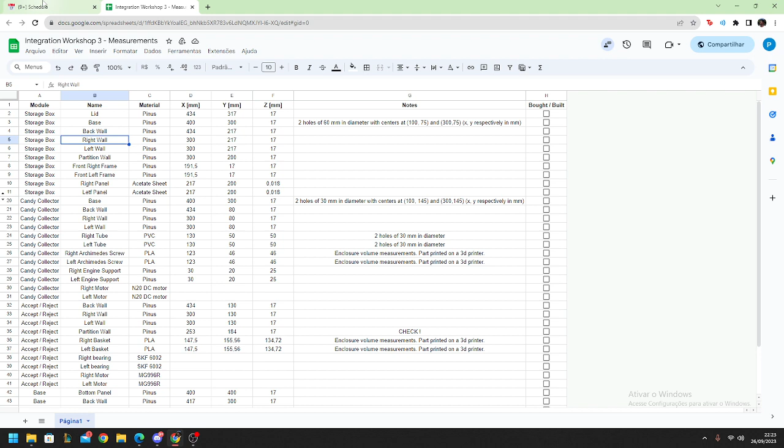Another task is to determine the measure of all pieces. We measured everything we need, because it's important for buying these pieces. We also had simple tasks, made the electrical design, some studying tasks, and some risk response tasks like testing and making the alternate electric design.

Let's talk about the deliverable itself. Just a note that we are 23 hours delayed because of this problem with the mechanical design. So let's go to the deliverable itself.

One comment: we also have this journal where we make notes of what we did each day. Here we talk a little about our problems, you can take a look after this video. So let's go to Deliverable One, that's what's important.

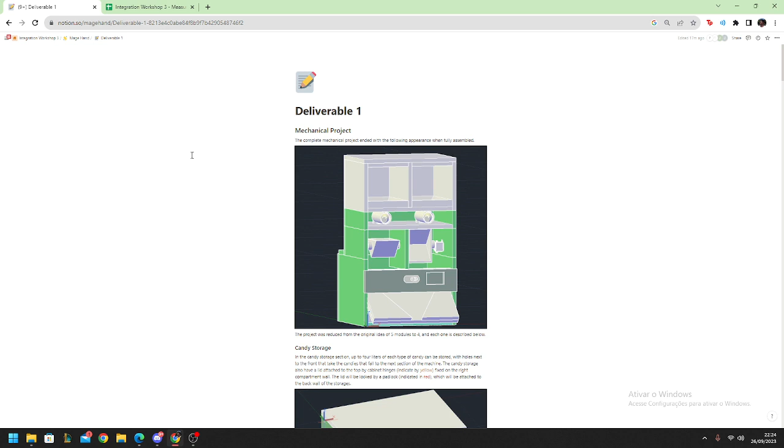So the mechanical project is like this, this is the complete structure. We divided it originally into 5 modules, but now it has only 4: the container of the candies, the picker, the accept and reject mechanism, and the base of the project.

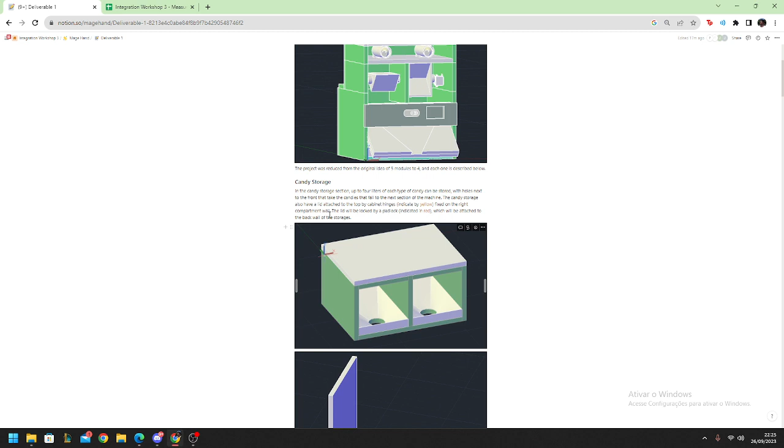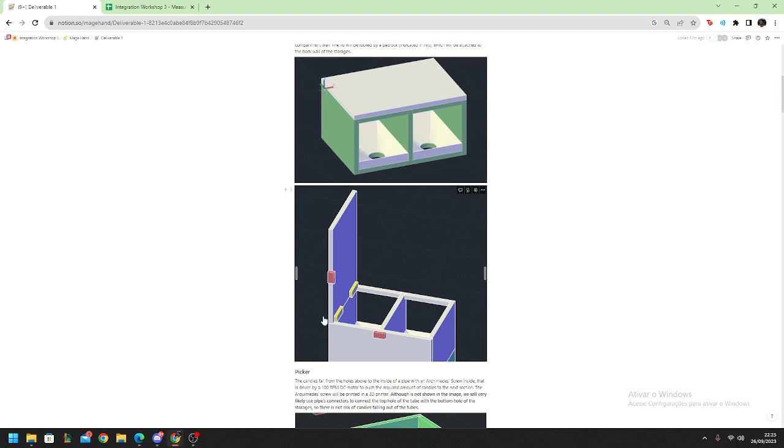Let's start with the candy storage. It can store up to 4 liters of each type of candy. It has these holes, and the candies will go through these holes. We also have these hinges where we'll attach the padlock, so the owner of the machine will be able to open it and replace the candies if necessary.

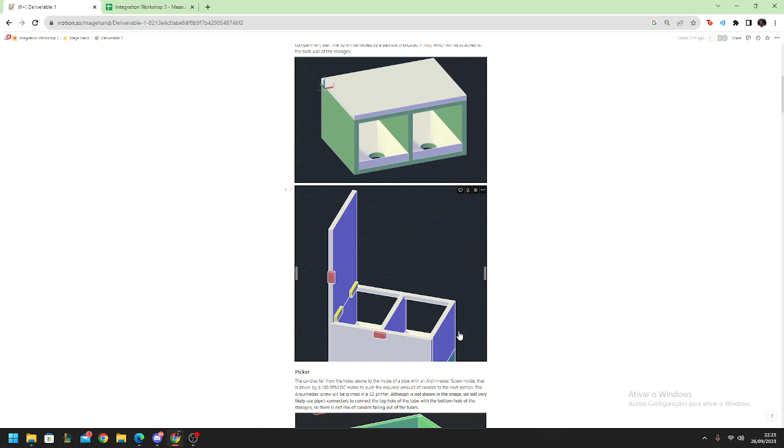The next part is the picker. We changed this mechanism to an Archimedes screw, which will be moved by a DC motor. This is one of the changes that the mechanical expert advised us to do.

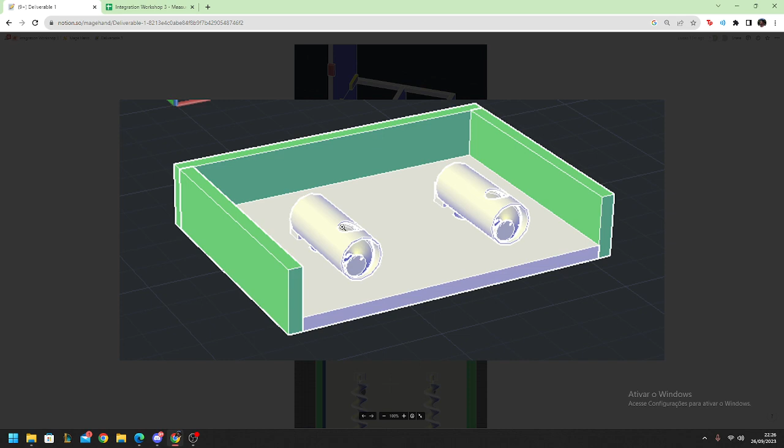The candies will fall out through this hole right here, and then with the Archimedes screw, they will move to the next section of the machine. Here you can see the top view, we can see the motors right here, and the Archimedes screw that will move the candies through this hole to the accept and reject mechanism.

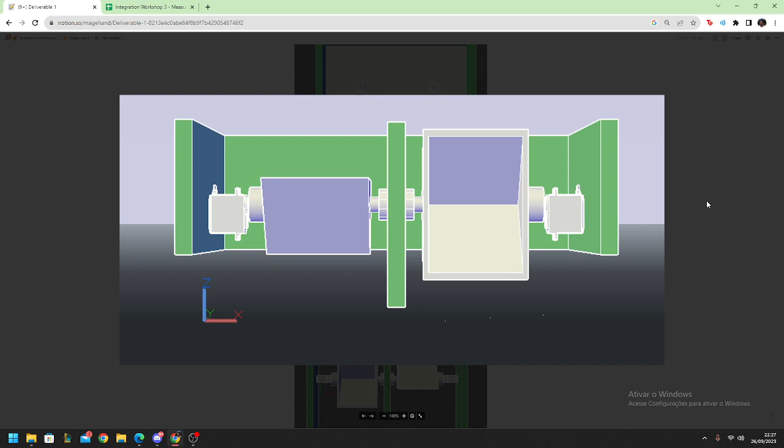Moving to the next mechanism, the candies will fall from this into these triangular scoops we made, because we'll use servo motors for this. We have two servo motors: depending on the customer, if he accepts, it will turn clockwise, for example, and if he rejects, the servo motors will move counterclockwise.

And the final part, we have this base, where all the hardware and components will be allocated. We also have this ramp where the candies will fall and go to the customer. This will turn clockwise, and then the candies will fall out into this structure. We made it triangular because when the servo motor moves 90 degrees, this part of the mechanism will be at 45 degrees, so we'll be pretty sure that all the candies will be dropped.

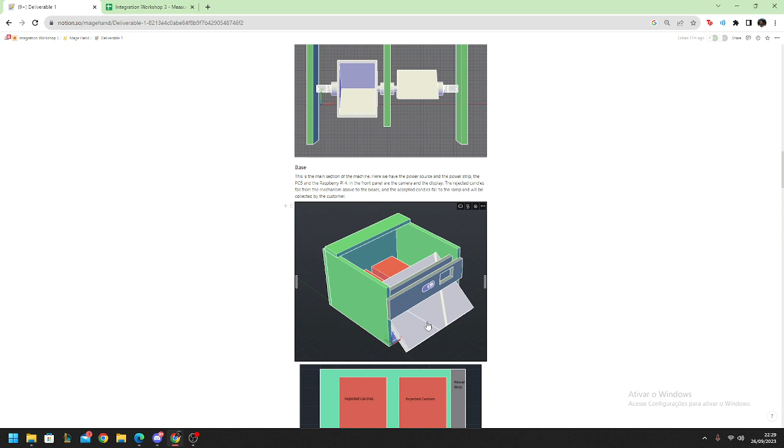We can see the top view of this right here. If this moves in this direction, it will fall out and the customer will take the candies. If this moves to the other direction, it will fall out into these boxes where the rejected candies will be stored.

We can see in this image the vision from the top. Here we can see the power strip that we will use. I will explain more in the electric part: the power source, the PCB, and the Raspberry.

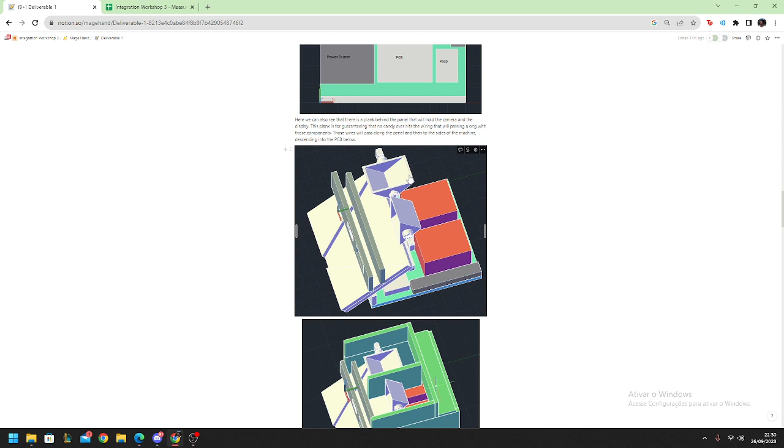So here we can see this mechanism more clearly. If this moves this way, it will fall out in this part of the structure, and then it will fall out to the customer. If it turns the other way, it will fall out into these boxes.

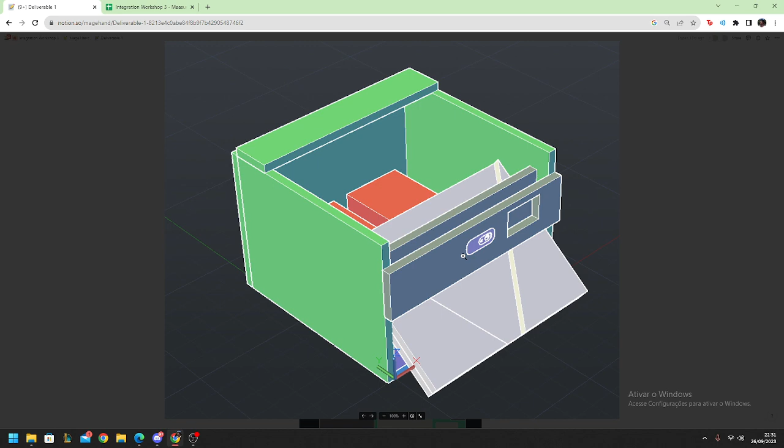Right here in the front, we have the camera that is in purple, and this is the place for the display. This part here in the back is where we will move the wiring of the structure to the camera and to the display, so it doesn't have contact with the candies.

For the final part, at the back of the base, we have these hinges in yellow that we will use to move this door, and this in red is where we will put a padlock to lock and protect the candies that will be rejected.

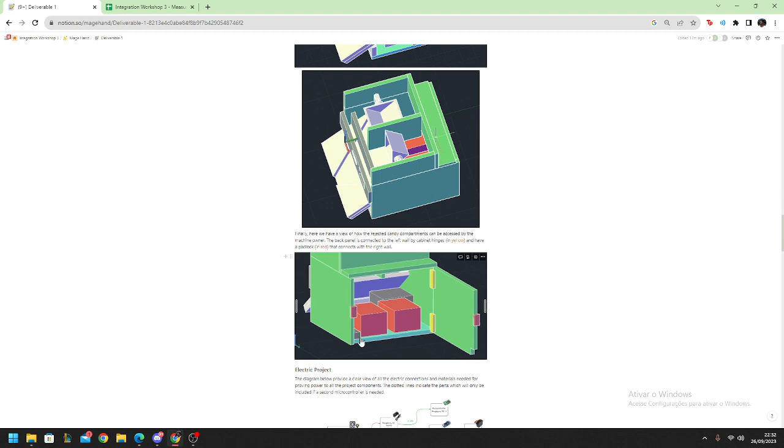So the owner can have the key for the padlock and then collect the candies, and also he can turn on or turn off the structure with the power strip.

So let's go to the electric project. Right here we have the wall socket where our power strip will be connected. In socket one, we will use the Raspberry source.

We are doing this because we don't want the Raspberry to be burned. That's why we use the Raspberry source that comes with the Raspberry, and we are not using the computer source to power the Raspberry.

In socket 2 will be the computer source that has the 12 volt source and the 5 volt source. The 12 volt is for 2 step downs that will power the 2 servos. We are using the step downs to 7 volts because we want higher strength for these servo motors, powering them with higher voltage for higher torque and strength.

With this 12 volt source, we will move the 2 DC motors that will move the Archimedes screw, which is in the second module, the second part of the mechanical structure. The 5 volt source we will use to power the display.

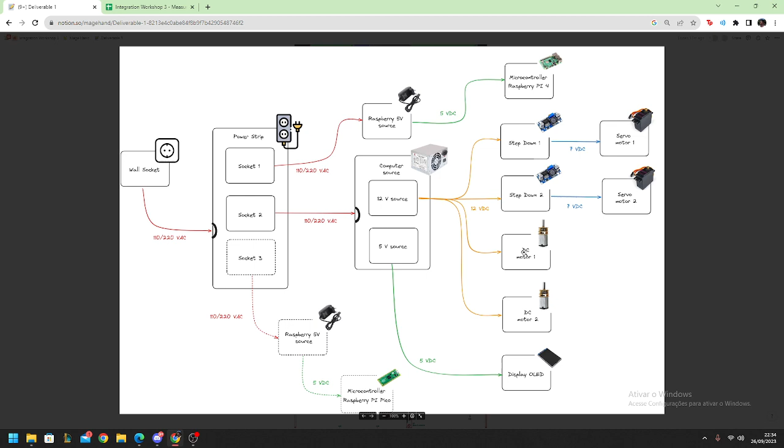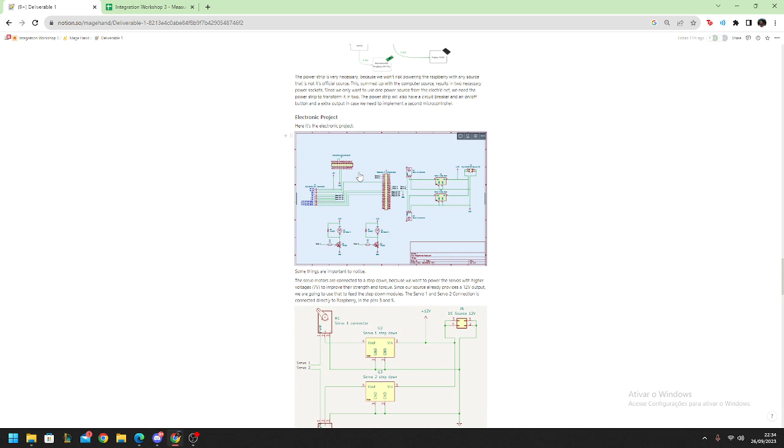So this is the electronic project where all the wires are connected. I will take it part by part, so don't worry. You can see it all in this.

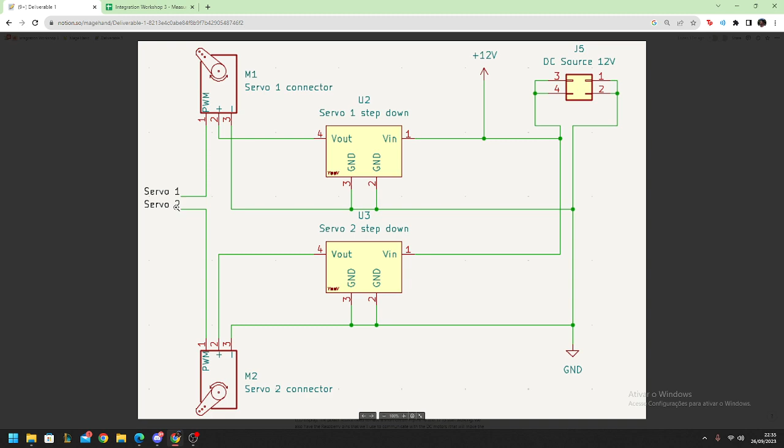In this first part, the servo part, right here, we have the 2 servos connected to this step down, and then the power sources that will power the step down, which will power the servo. And this is the connections with the Raspberry that we will see right after here.

So the servos are right here in these pins. We have this connector from the power source of the PC. We need to do this to turn on the power source, so that we can use all the pins.

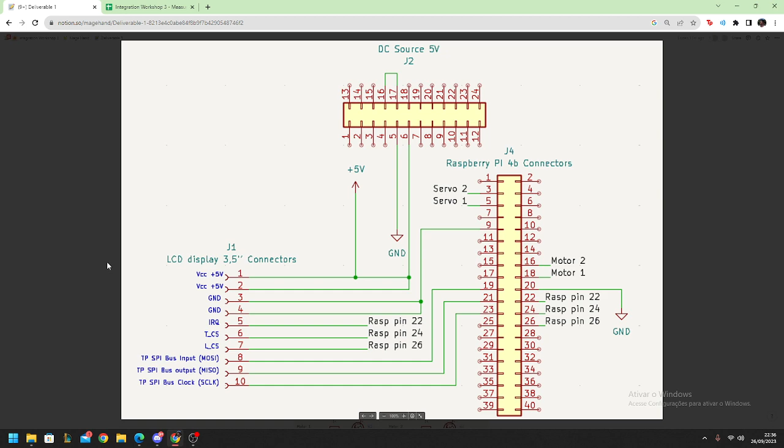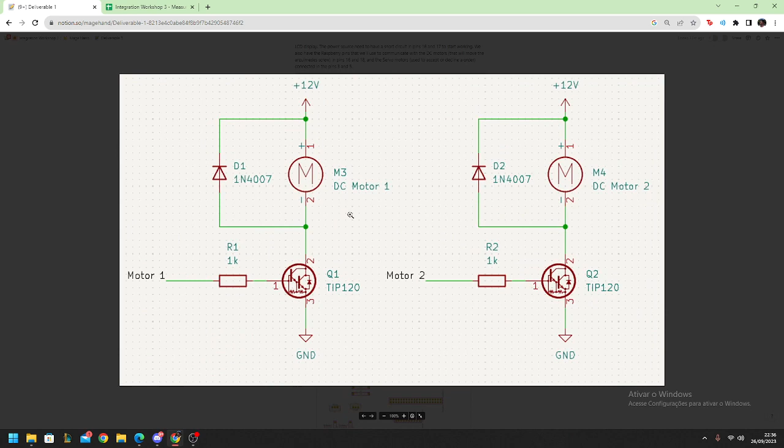These two connections are the DC motors that we'll see right after here. We have some diodes, some resistors, and some transistors to control the motor, and all of this will be in the PCB, the printed circuit board. The motor connections are powered with the 12 volt power source.

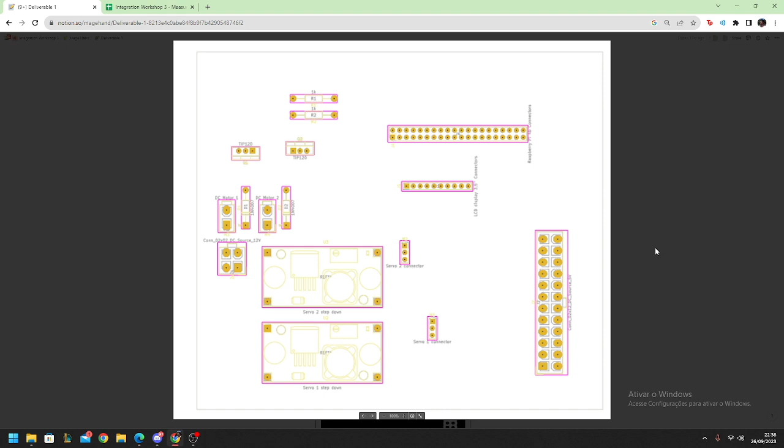You can see right here the project of the PCB. Here we can see the components, for example the resistors, the diodes, the connectors, the servos, and all other components right here. We can also see the routing of the PCB right here, showing how the PCB connections will look.

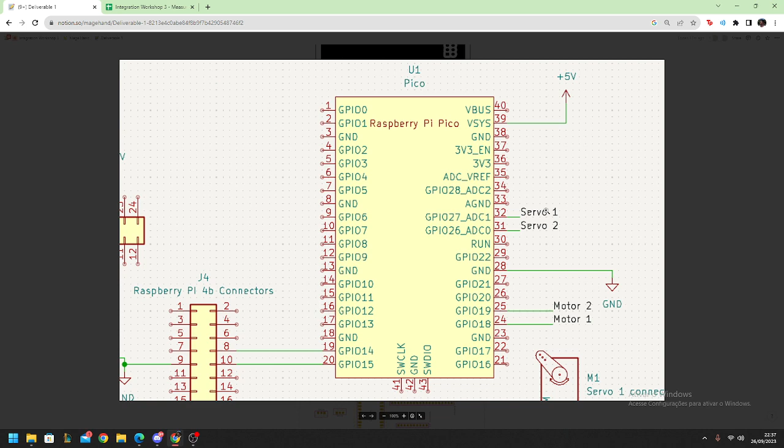Right here we have the connection with the plan B part. That is, if we will use a second microcontroller, the Raspberry Pi Pico, it will be connected to the Raspberry and will control the servos and the motors, and also the routing of this. And that's it. Thank you.